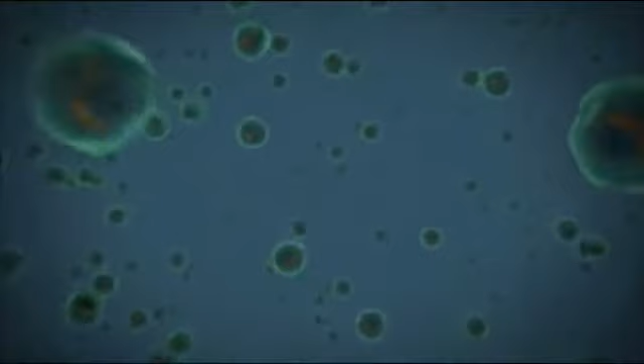Ocean is considered as the cradle of life, where life originated 3.5 billion years ago and formed a huge treasure house of life and resources. India, with its long coastline and large exclusive economic zone (EEZ), recognized the need for technology development for ocean exploration and for harnessing resources in an environmentally sustainable manner.

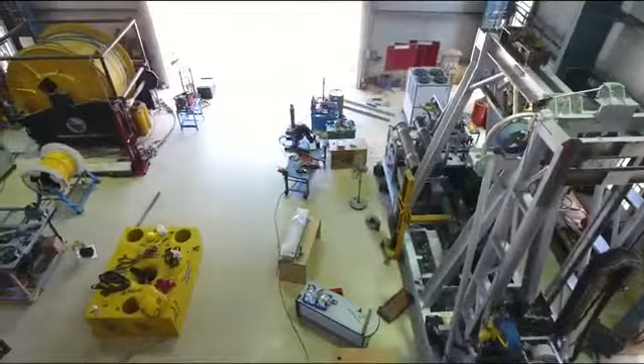The National Institute of Ocean Technology (NIOT), the only civilian ocean technology institute, was started when this need was recognized by the then Department of Ocean Development (DoD) and now the Ministry of Earth Sciences, Government of India in 1993. Subsequently, as the activity started growing, a separate campus at Pallikaranai, Chennai was established in the year 2000 with a mandate to design, develop and demonstrate technologies for the oceans.

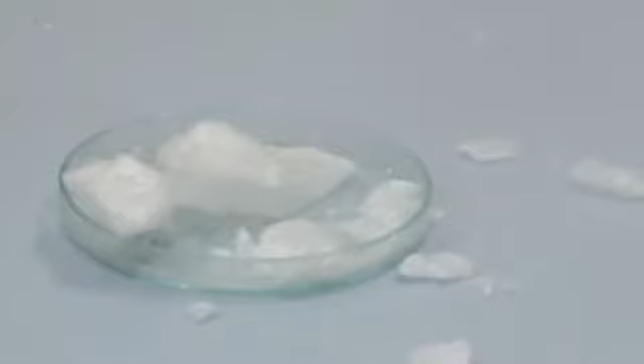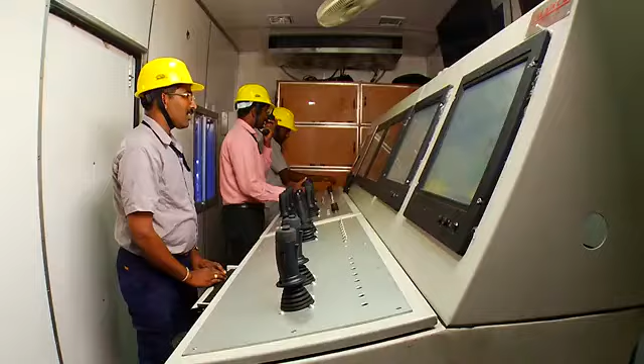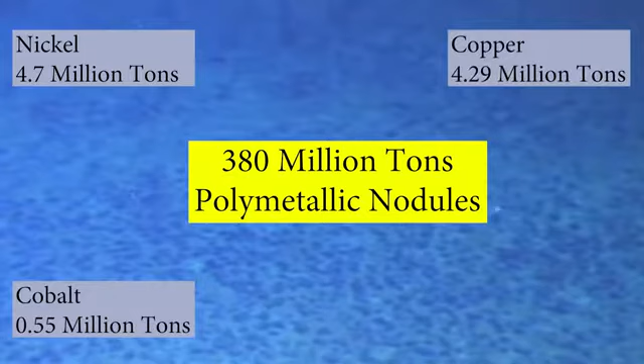Some of the major non-living resources that the oceans offer are polymetallic nodules, cobalt-rich manganese crust, hydrothermal deposits and gas hydrates. As a pioneer investor, India was allotted 75,000 square kilometer area in the Central Indian Ocean Basin (CIOB) by the International Seabed Authority (ISA), United Nations, for the survey and exploration mining of polymetallic nodules at 6,000 meters water depth. Surveys estimate the resource potential of polymetallic nodules in the area as 380 million tons, containing 4.7 million tons of nickel, 4.29 million tons of copper, 0.55 million tons of cobalt, and 92.59 million tons of manganese.

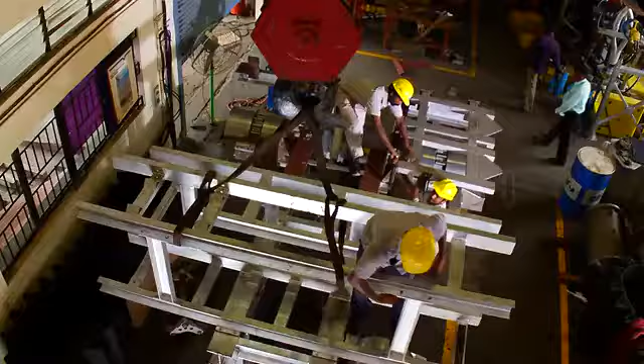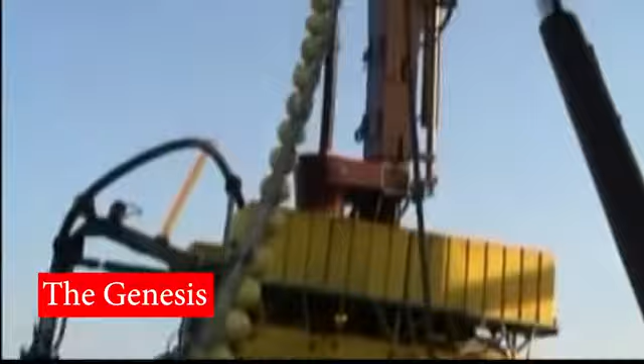Developing suitable technologies for safe, sustained and eco-friendly exploitation of these potential resources is also of strategic importance. Mining of manganese nodules from the soft ocean floor at a depth of 5,000 to 6,000 meters is a major technological challenge. In India, the design and development of the deep-sea mining system has been taken up by NIOT under the aegis of Ministry of Earth Sciences. To minimize developmental costs and associated risks, initial efforts were focused on realization and qualification of machinery for long-term operations at shallow waters, and a flexible riser concept with a crawler-based mining machine was chosen for the development.

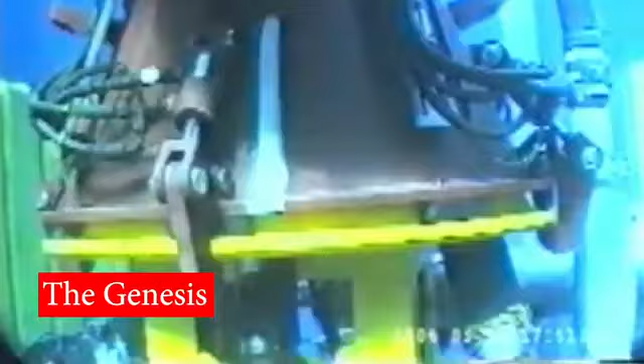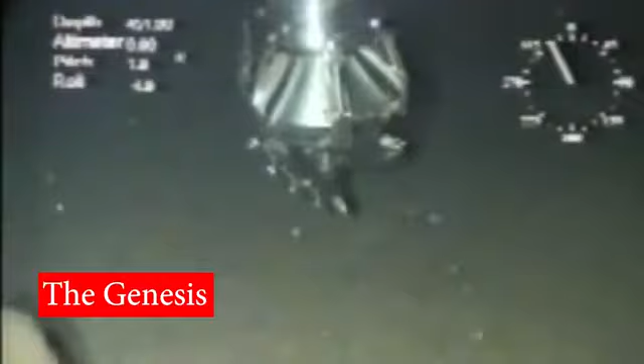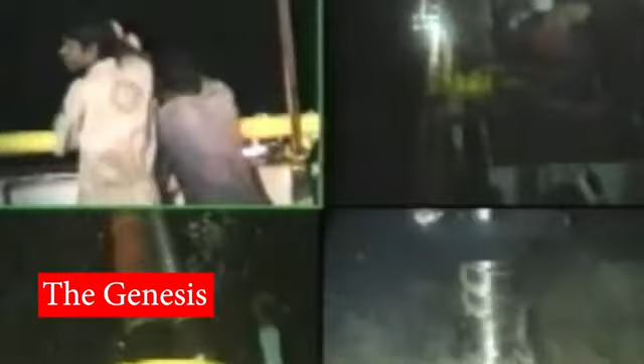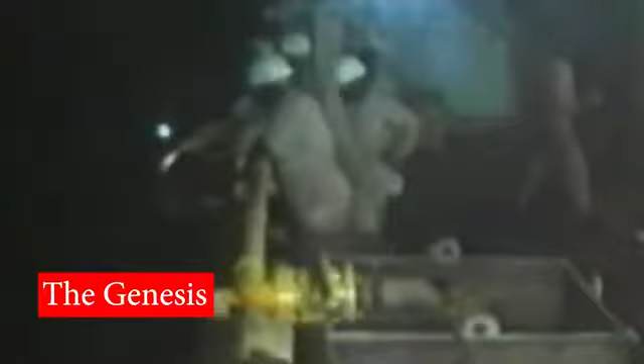Development of this complex technology is being attempted in a phase-wise manner. In the first phase, an underwater mining system was developed and tested for mining seafloor material for a short duration at 410-meter depth. The subsystems such as crawler-based mining machine, flexible riser system, positive displacement pump, electrical systems, sensors and control systems proved during the development phase. The mining system was tested for long-term operation for pumping seafloor material at 452 to 515 meter depth.

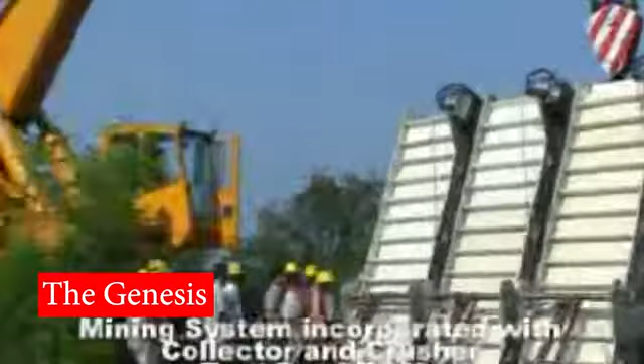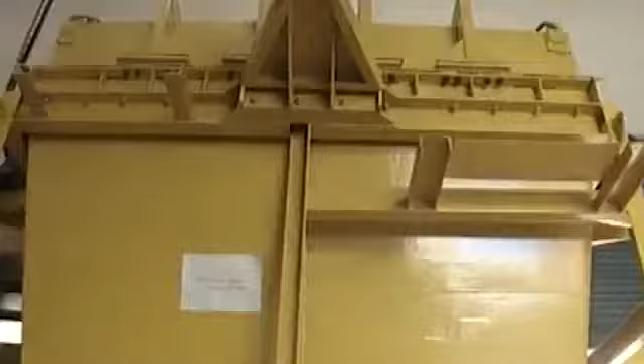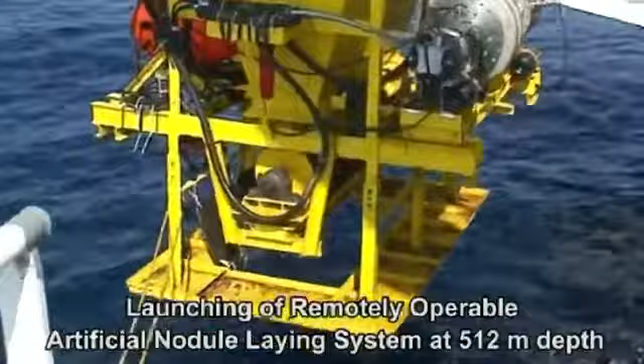The machine was modified for augmenting with a mechanical collector, underwater crusher for testing at shallow waters with artificial nodules. Artificial nodules were prepared with mechanical properties close to that of manganese nodules. After the long endurance tests, a remotely operated subsea artificial nodule laying system was developed for creating a small mine site similar to that of the one in the CIOB. The system was tested successfully off Chennai coast.

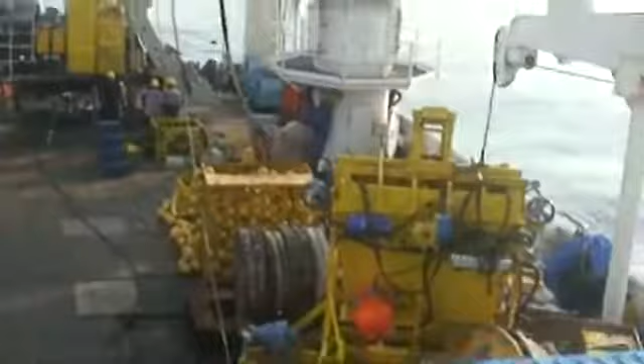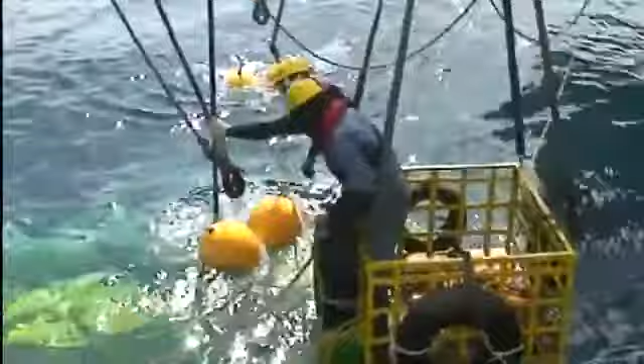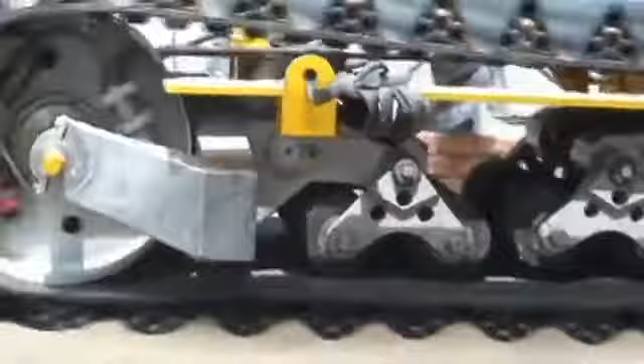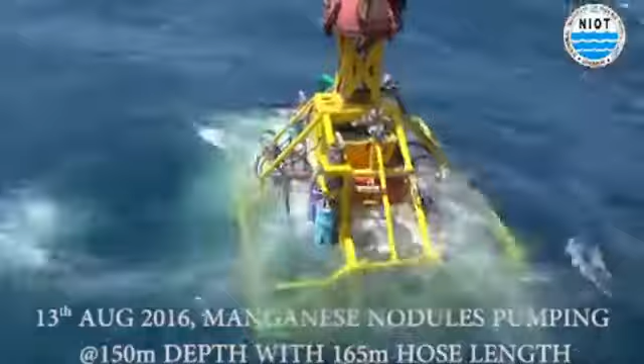The augmentation of the deep-sea crawler with collector crusher for deep ocean mining of polymetallic nodules was done as the next step. The system was tested in the sea by pumping artificial nodules laid on the seabed. Efforts are on to develop crawler-based mining machine for 6,000-meter depth. The main challenge is to develop the seabed crawler that can move on the soft seabed and flexible riser for pumping the nodules to the surface ship. Buoyed by the successful demonstration of the system at 890 meters water depth, NIOT scientists are gearing up for 5,500 meter operation.

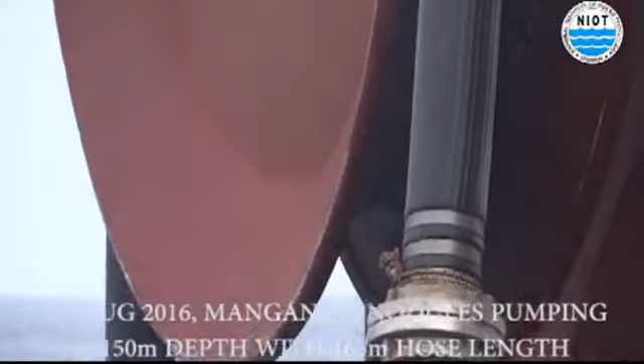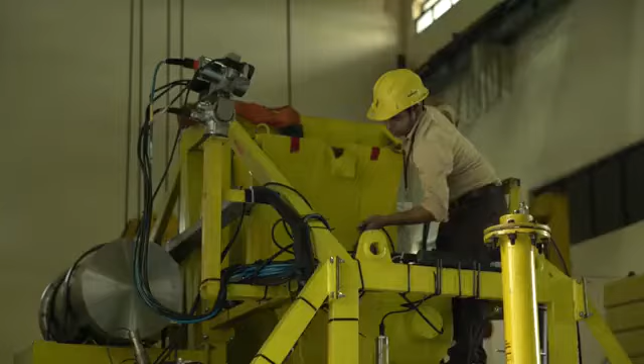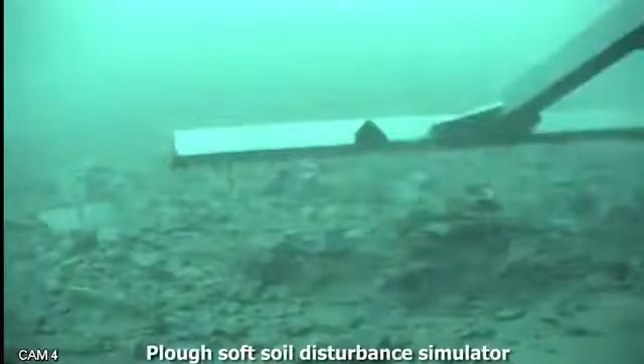The knowledge of bearing and shear strength parameters of the soil are required for designing the integrated mining system for 6,000 meter depth. The shear strength of the soil also provides useful information for the maneuverability and control of the mining machine. It is also imperative that the mining area be delineated to eliminate vulnerable areas of low strength where the equipment may sink suddenly beyond recovery due to anchoring of the machine.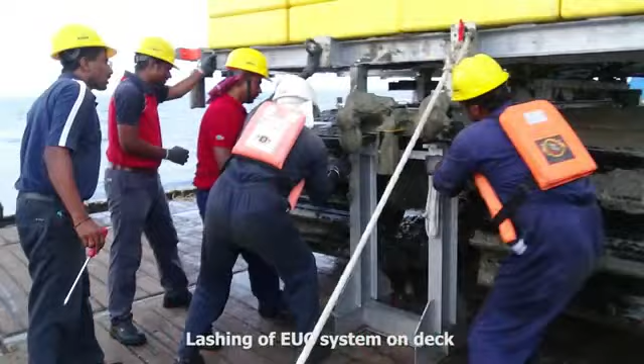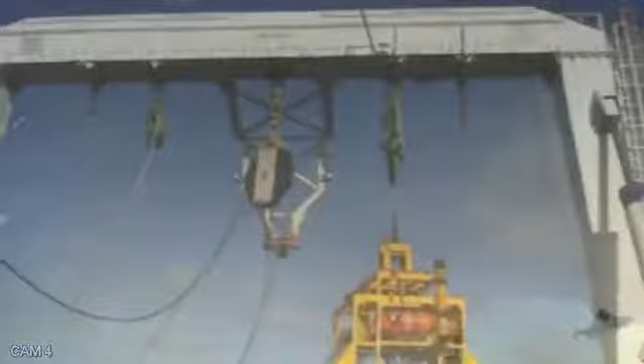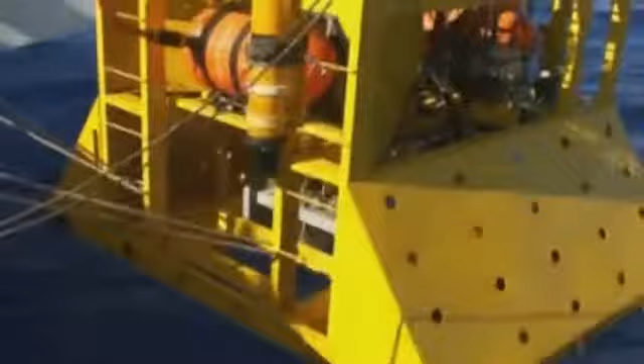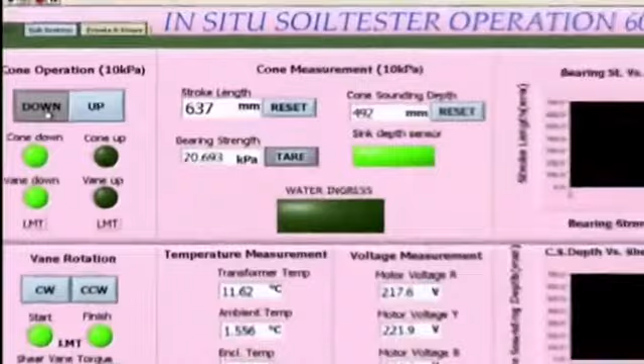A remotely operable in-situ soil tester has been developed for 6,000 meter operations. Soil property measurements and equipment's performance at 5,462 meter water depth in the Central Indian Ocean Basin has been successfully carried out. This was also the first time that the polymetallic nodules present on the seabed at CIOB were actually seen remotely and photographed with high clarity by an Indian system. Incidentally, this was the deepest point reached by Indian-made equipment and successfully recovered.

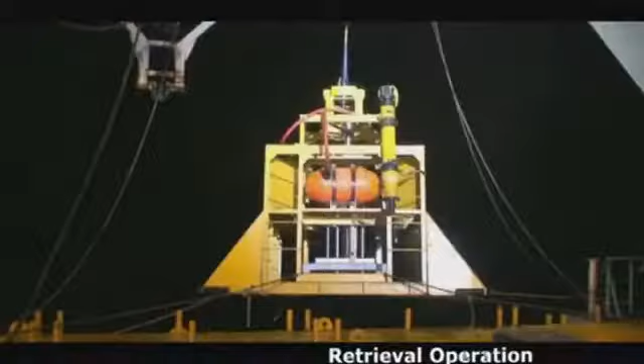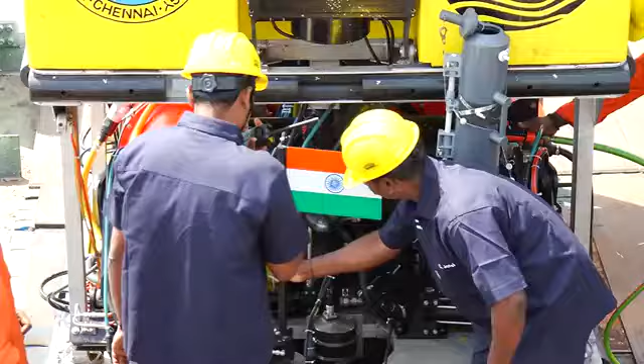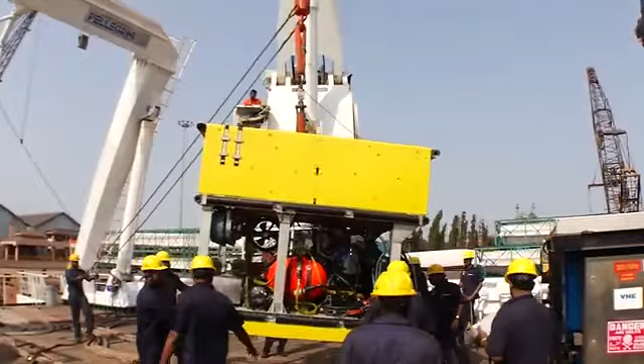As a part of the Indian Deep Sea Technological Development Program, NIOT developed a 6,000 meter depth-rated deep water remotely operated vehicle (ROV) named ROSUB 6000. The ROV is an unmanned electrical work class underwater vehicle and has 7 electric thrusters for maneuvering in all 6 degrees of freedom in the manual or automatic mode.

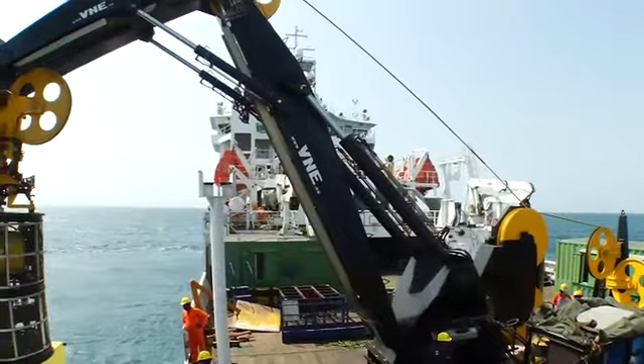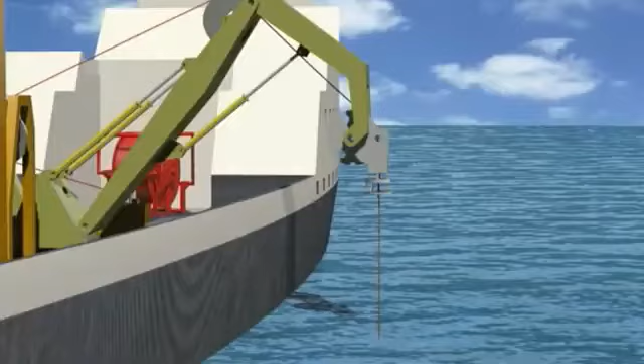The storage winch on the mothership houses the electro-optic umbilical, and its operations are with the launching and retrieval system (LARS) and other deck gear, which launches the ROV and tether management system (TMS) below the splash zone in the docked condition. After reaching the desired depth, the ROV is undocked from the TMS for desired operation in deep waters.

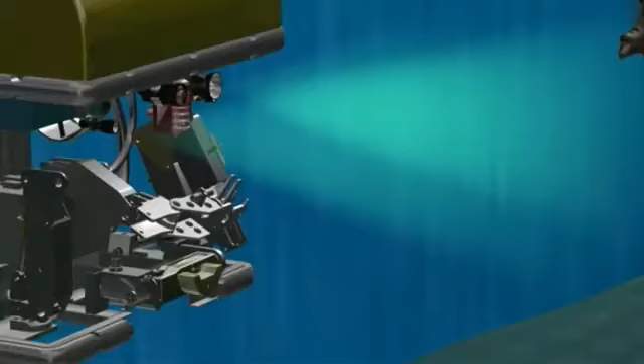The system was utilized for gas hydrates exploration in the Krishna-Godavari basin in the Bay of Bengal at about 1,000 meter depth. Polymetallic manganese nodules in the Central Indian Ocean Basin at 5,289 meters.

And hydrothermal sulfides at the Central Indian Ridge in the southern Indian Ocean near the Rodrigues Triple Junction at 2,800 meter depth. ROSUB 6000 was deployed for the IAF aircraft AN-32 search operation in Bay of Bengal at a depth of 3,400 meters, and targets were verified at the 3 given locations.

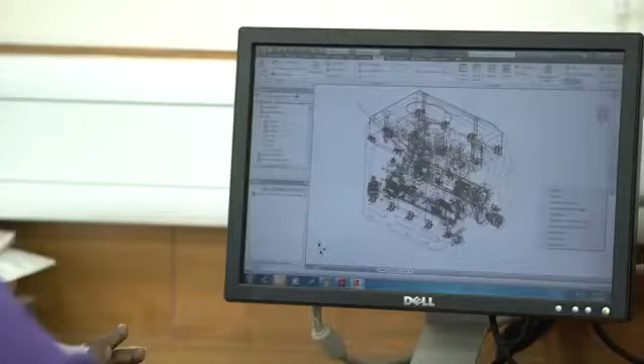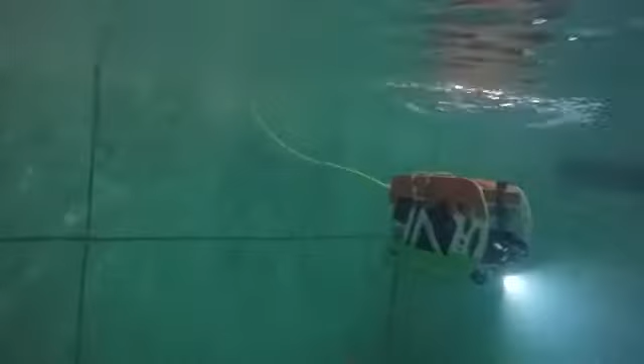Based on the experiences gained in the design, development and operation of ROSUB 6000, an ROV useful for polar and shallow water regions rated for 500 meter water depth was developed. The vehicle PROV is qualified for its performance in NIOT Acoustic Test Facility ATF and for the low temperature conditions in the environmental chamber. The vehicle could be launched from any vessel of convenience. Doppler velocity log and compass module are used for underwater position estimation.

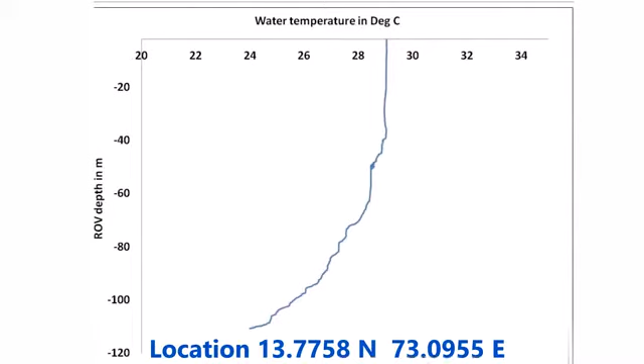The vehicle is equipped with adequate cameras and lights for visual imaging, sector scanning sonar for acoustic imaging purposes, and an oceanographic sensor suite comprising of dissolved oxygen, conductivity, irradiance sensors for water column observation.

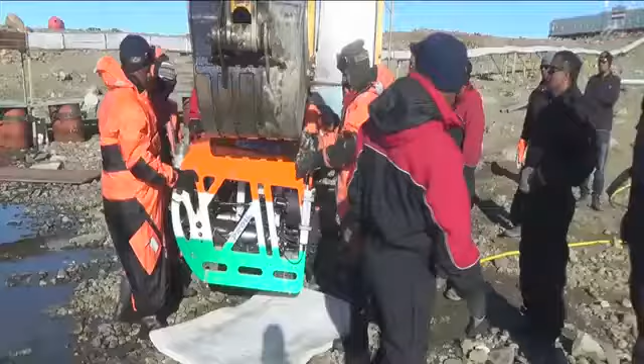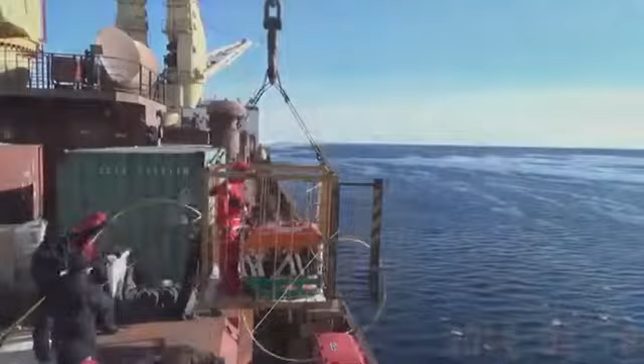After its qualification at Idukki Reservoir in Kerala, the PROV was utilized during the 34th Indian Scientific Expedition to Antarctica during January-April 2015. The vehicle was deployed in the Priyadarshini Lake near the Indian base station Maitri, where the lake bed images are taken. Subsequently, the vehicle was deployed in the new Indian Barrier Ice Shelf region up to 62-meter water depth, where the ice shelf images were captured using the sonar.

PROV was used for coral reef expedition in the Andaman and Nicobar Islands of India, which are the hotspots of biodiversity with their unique coral reef bioreserve. High-definition coral reef images were captured up to a depth of 30 meters near Andaman Sea, North Bay and Chidiatopu and Bay of Bengal Islands, forming a part of Mahatma Gandhi Marine National Park of Andaman.

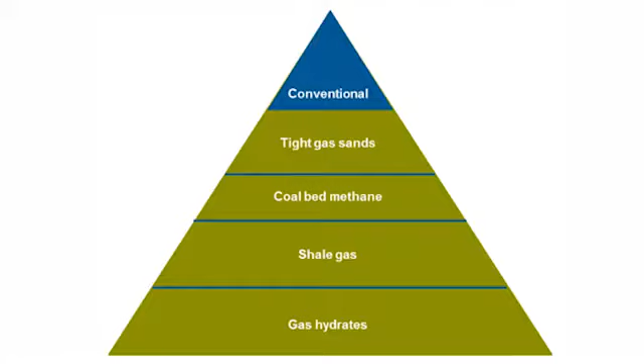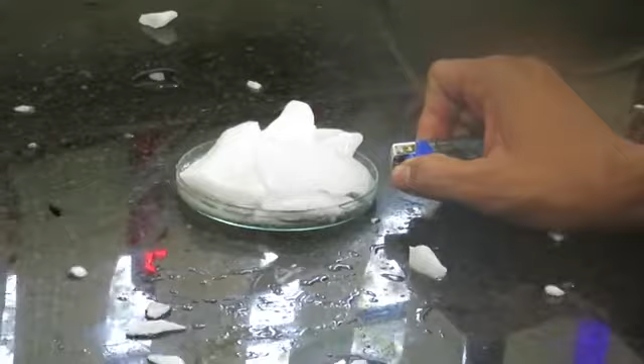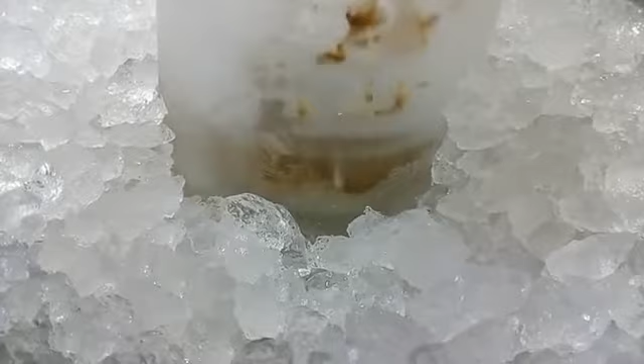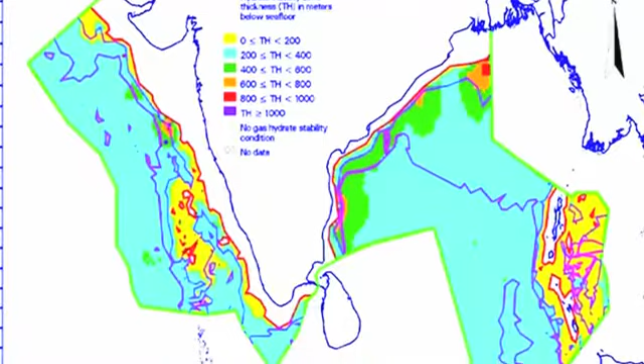Globally, laboratory and field investigations are in progress for non-conventional energy resources. Coalbed methane, shale gas, and gas hydrates are some of the potential alternative sources of energy. Gas hydrates are crystalline substances composed of water and hydrocarbon gas molecules in which solid lattices of water molecules trap gas molecules in a cage-like structure known as clathrates. Estimates show that the methane stored in the form of gas hydrates is in the order of approximately 950 trillion cubic meters within the Indian Exclusive Economic Zone.

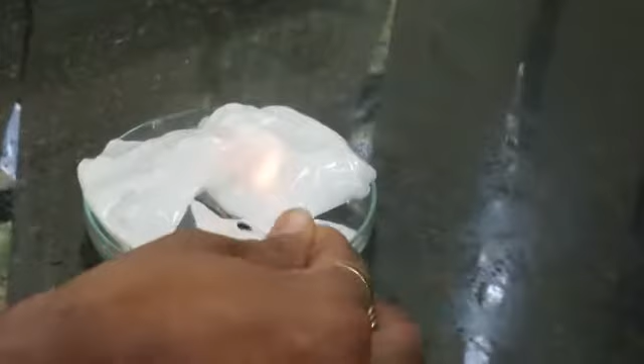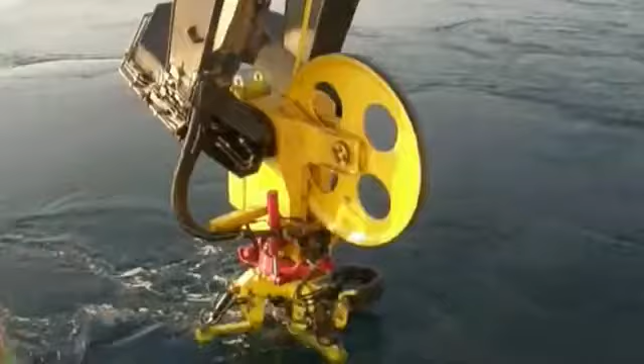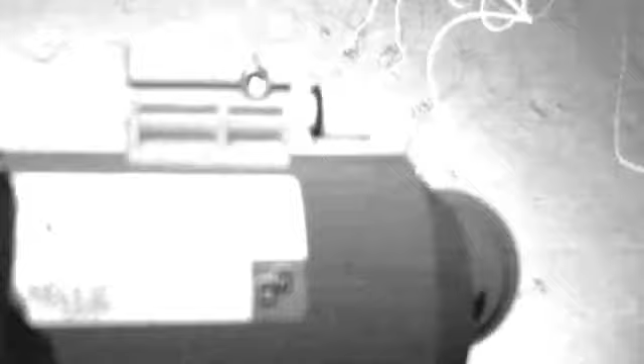NIOT is involved in technology development for methane hydrate research in India. Scientific exploration for gas hydrate was conducted with the help of NIOT ROV. ROV interfaced with scientific payloads made dives at a depth of 1,037 meters and 1,019 meters in Krishna Godavari Basin in Bay of Bengal at sites identified by NIO and NGRI Hyderabad. The ROV-based multi-beam sonar survey was carried out within 80 meters square from an altitude of 25 to 30 meters above the seafloor at a depth of 1,019 meters.

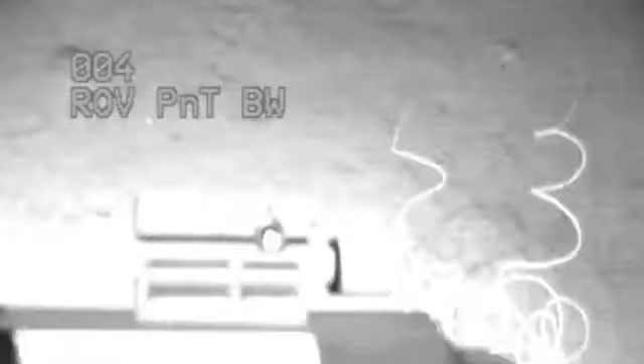Seafloor sediments were collected with short push corer and water sample was collected using the manipulator. The observed mound-like features are similar to the chaotic submarine seafloor, disruption craters and pingo-like structure observed elsewhere at gas seepage margins in the deep ocean. The observed spiral whip coral colony was similar to Cirrhipathes spiralis, indicator of chemosynthetic habitats and methane seeps.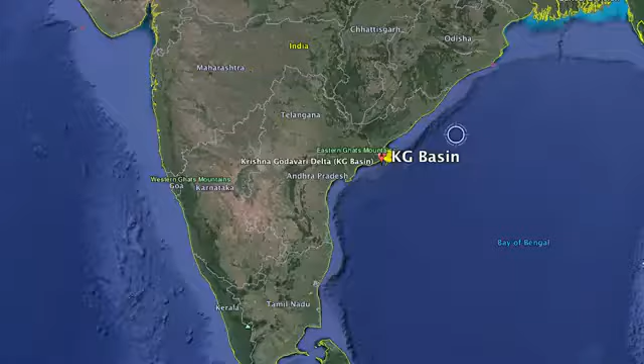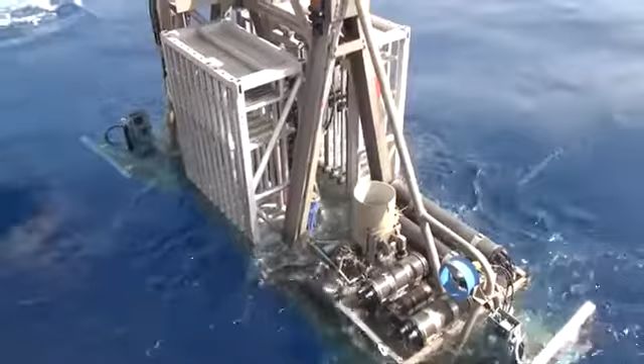To cater to the need for exploration and ground truth validation of gas hydrate occurrences in Indian waters, and to quantify the resource in the Indian continental regions, NIOT has developed an underwater wireline autonomous coring system ACS. System is capable of obtaining 100-meter core up to depth of 3,000 meters. ACS uses wireline drilling technology.

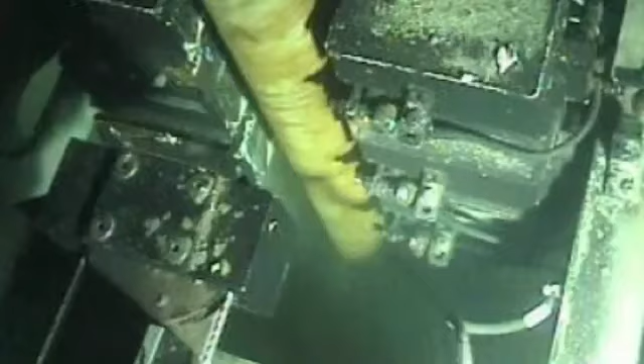A proper characterization of hydrate-bearing sediments requires coring, recovery, and testing under pressure and temperature within the stability conditions. For this point of view, ACS has a pressure core sampler with a length of 1.5 meters and 36 mm diameter. This tool can be used for sampling the gas hydrate at in-situ pressure.

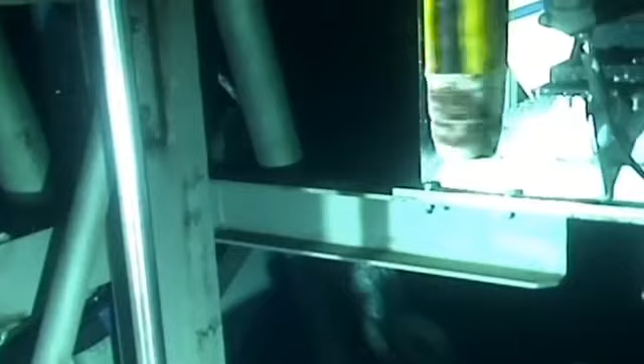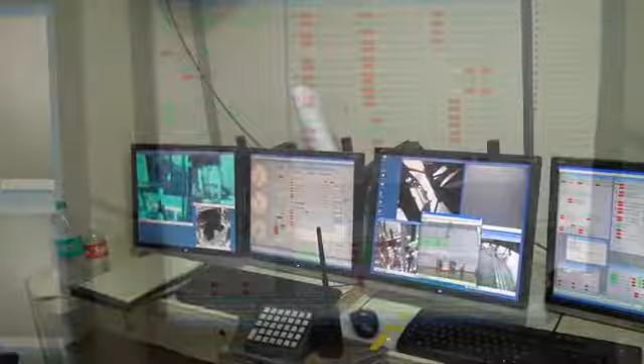The ACS system comprises subsea coring, drilling unit, launching and recovery using A-frame and deep-sea winch, control console, deck powerhouse, control software, umbilical cable with termination assembly. The ACS is fully controlled from a surface station based on the sensor feedbacks. Sensors and camera images provide information on drill functions.

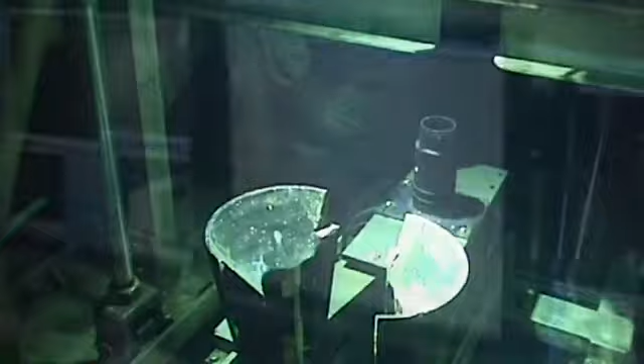These sensor data are used as the input for the ACS real-time control software, which generates the necessary signals to perform the intended tasks. This has been depth qualified for 3,000-meter operations and drilled up to 40 meter below the seafloor at 850-meter water depth off Chennai. System was landed at soft seafloor of KG Basin gas hydrate site with soft foot assembly. Further trials and coring at KG Basin gas hydrate site are on the anvil.

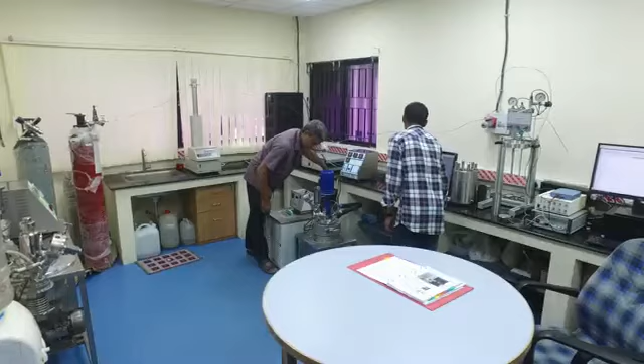To understand the feasibility of methane extraction from gas hydrates, studies are carried out at NIOT by numerical simulations, laboratory experiments, and using gas hydrate reservoir modeling packages. Electrothermal heating and depressurization techniques were applied to the field data sets of Krishna-Godavari Basin, Mahanadi Basin, and Andaman reservoirs. Studies on subsidence and environmental impact due to hydrate dissociation are in progress to develop the EOI for developing the production methodology.

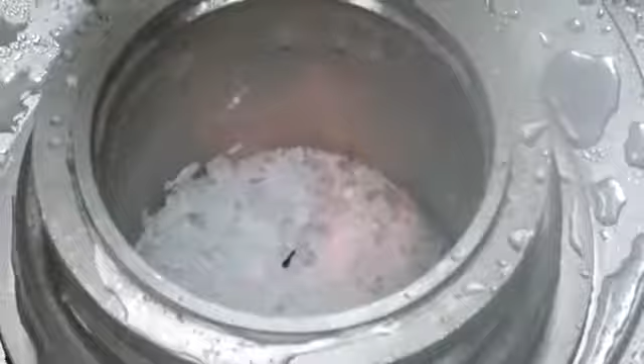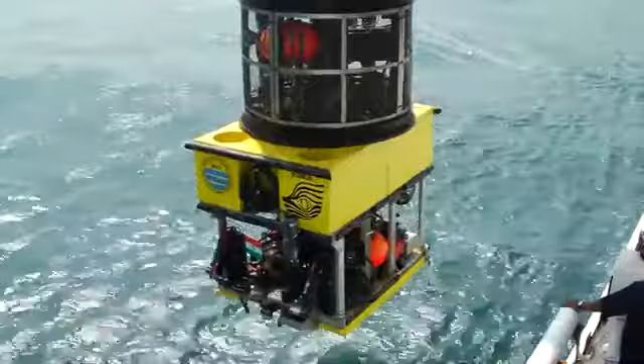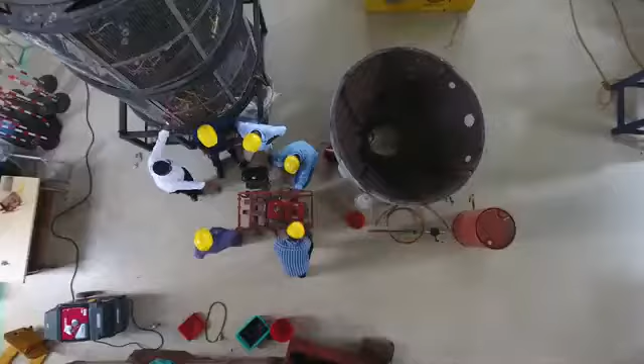The underwater remotely operated vehicles and autonomous vehicles have their own advantages and limitations. A manned research submersible can combine these advantages. Hence, NIOT is in the process of developing a manned submersible with a depth rating of 6,000 meters to aid direct human intervention. This manned submersible with 2 scientists and a pilot on board with suitable observation, sampling and intervention tools can be an aid for deep ocean exploration and intervention.

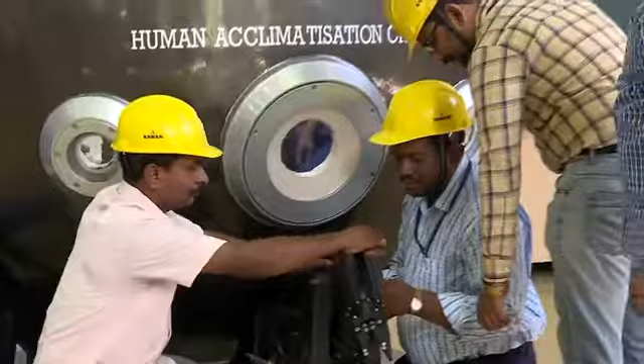Vehicle will have a 12-hour endurance with an emergency support for 96 hours. The development of the Indian human deep ocean submersible Matsya 6000 is in progress, and the Indian Samudrayan will make its deep ocean voyage soon.

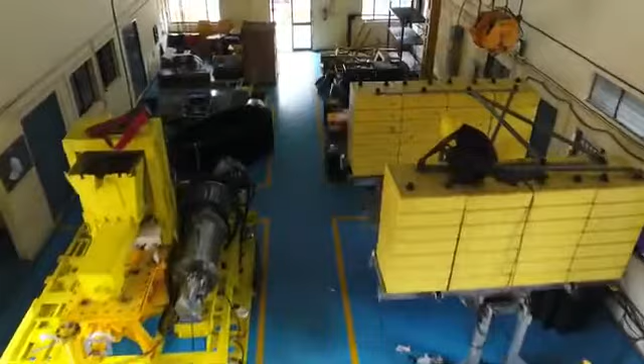The statement that about 70% of the earth is covered with water is not a mere cliché. It means that 70% of the earth resources are still unexplored and are available to mankind. Development of reliable technologies for the exploration and harvesting of these resources is the need of the hour. With ever-evolving mandate of the National Institute of Ocean Technology and the Ministry of Earth Sciences, Deep Sea Technology Group continue their inner space odyssey in the development of these technologies.